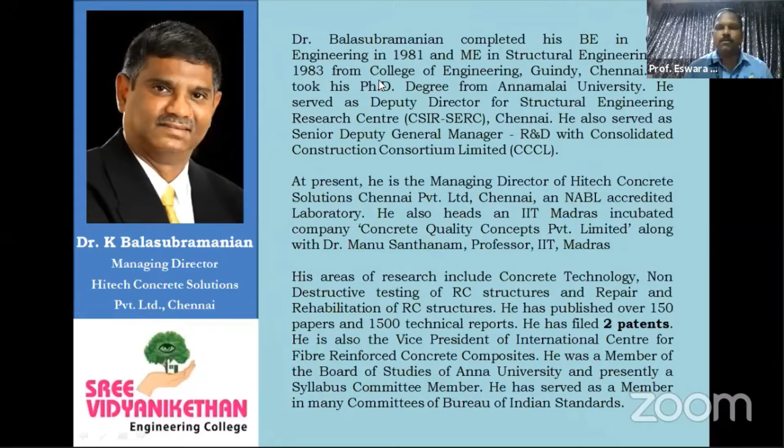This is comprising, Mr. Yuvraj was telling that it's comprising of faculty and students, and also somebody from the industry, right sir? Yes, sir, practicing engineers. It's a FDP, so faculty members, and we have opened it for even research scholars and students also. Very few students are there, around 50 to 60 students. Okay, sir, thank you very much, sir.

Good morning. I would like to thank Professor Eswara Reddy and Dr. Yuvraj for giving me this opportunity to speak to you. Today, what I'm going to speak to you is on the very practical aspects of concrete NDT practices and case studies. My approach would be basically to tell the faculty to approach any problem from a consultant's perspective. You are all very strong in teaching, and for the past 10 years I've been more in the industry, so my talk will be more oriented towards solving industry issues from a practical consultant's perspective. This is what I wanted to tell as an introduction, and I would straight away go into the topic.

I've been doing NDT for the past almost 35 years, so I would like to tell you all the positive aspects and the limitations also in the various NDT methods.

What are the various investigation methods? We have non-destructive tests, intrusive tests, and load tests. These are the three things, because IS 456 says when there is an issue, you do a non-destructive test, then do a core test, and if that fails, do a load test, and if that fails, do a load test again. And even if the load test fails, do one more time, and finally if everything is not satisfying, then you demolish. They are not straight away telling you to go and demolish a structure.

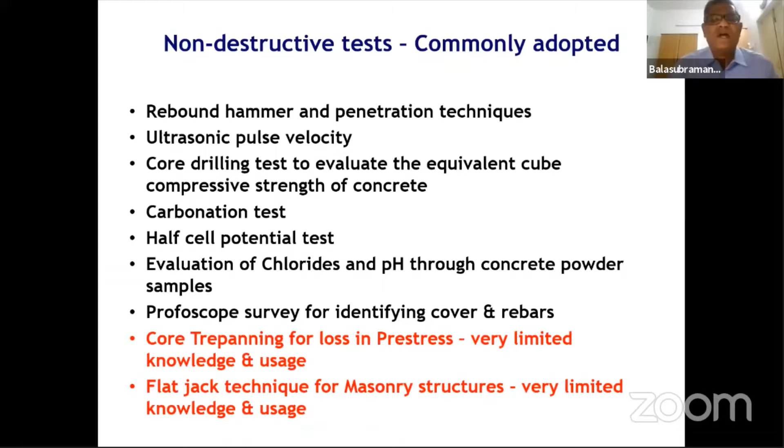What are the various non-destructive tests that are commonly adopted? I might have missed one or two, but these are the common non-destructive tests used in the construction industry: the rebound hammer test, ultrasonic pulse velocity test, core drilling test to evaluate the equivalent cube compressive strength of concrete, carbonation test, half-cell potential test, and even resistivity test, then evaluation of chlorides and pH through concrete powder samples, and the profoscope survey for identifying cover and rebars.

Some methods that are not very widespread in use are the core trepanning method for loss of pre-stress. Generally we have a lot of bridges with pre-stress girders constructed in the 80s, and now we go there for condition assessment, where this core trepanning method is very useful. Organizations like SERC have fairly good knowledge about this core trepanning method, and other places may be slowly adopting it. The other one is the flat jack technique for masonry structures.

Again, very limited knowledge and usage. SERC has been doing work in this area for more than 15-20 years. IIT Madras also does a lot of work on the flat jack technique, because we have a lot of masonry structures, monumental structures, where rehabilitation is required. To do the rehabilitation, we need to understand the stress levels, and for that these flat jack techniques are being used.

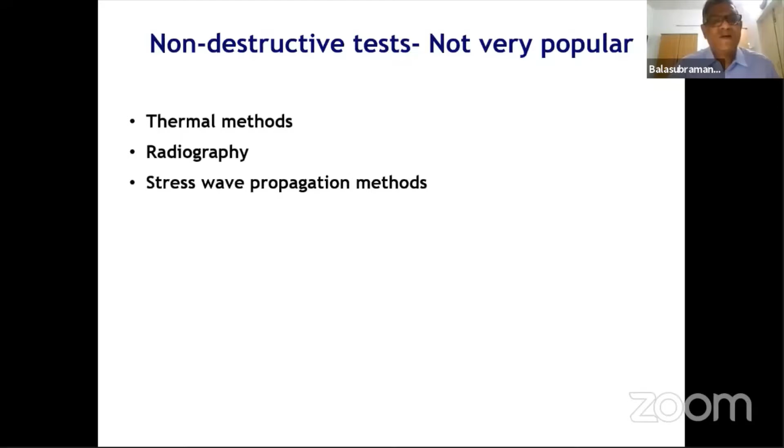So these are the various non-destructive methods. The non-destructive methods that are not very popular are the thermal method, radiography method, and stress wave propagation method. These methods are not popular because of the lack of physics knowledge on the part of structural engineers, and our reluctance to work as a team with consultants who have a strong physics base.

For example, you have impact echo. There are so many things. People are carrying it to construction sites, but the interpretation is a little difficult. Unless you have a very strong physics knowledge, or at least have somebody in the team with strong physics knowledge, it is very difficult to interpret these methods. That's why they have not become very popular.

But shortly I feel people will be working more and more on this. As they work more in the laboratory and then take it to the field, some correlation can be obtained, and then these methods will become more popular.

Right now, we are using some very rudimentary methods like rebound hammer, UPV test, and all that. My structure of the talk is: first I'll quickly go through the various test methods and their limitations. Then I'll go into situations where these tests are being used, and finally I'll wind up with a case study.

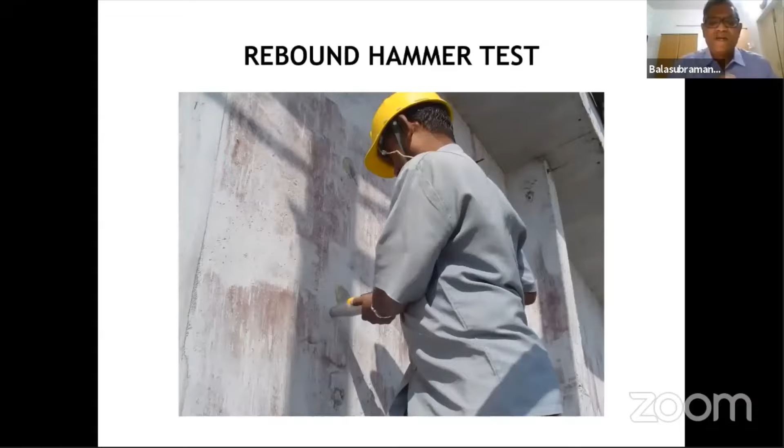So rebound hammer test - most of you are aware of it. It's basically a handheld equipment that measures the surface hardness of the concrete. The rebound is measured on a graduated scale, giving a rebound number - the larger the number, the harder the surface. It's basically a qualitative test.

Unfortunately, what is happening in our country is this rebound hammer test is being grossly misused. The reason is rebound hammer numbers cannot predict the compressive strength very accurately. They have calibration graphs supplied by the manufacturer, or some laboratories make cubes, hit the hammer, and try to make a correlation graph. But from my experience, it is very, very dangerous to use a rebound hammer to predict the compressive strength of concrete.

Because it always gives 1.5 to 2 times more than the actual strength. So basically it's a qualitative test, because it measures near-surface characteristics of the concrete, meaning it measures the quality of the cover concrete. The cover concrete is very important because it is through the cover concrete that chlorides or carbon dioxide diffuse into the concrete and depassivate the steel. So the cover concrete is more important, and this rebound number may give you some idea about the quality of the cover concrete.

But to predict the strength of the concrete based on the rebound number is a little risky. It depends on the smoothness of the surface, varies with the size, shape, and rigidity of the specimen, and is affected by the degree of saturation. Generally, carbonated concrete gives a very high number. These are some of the limitations of the rebound test.

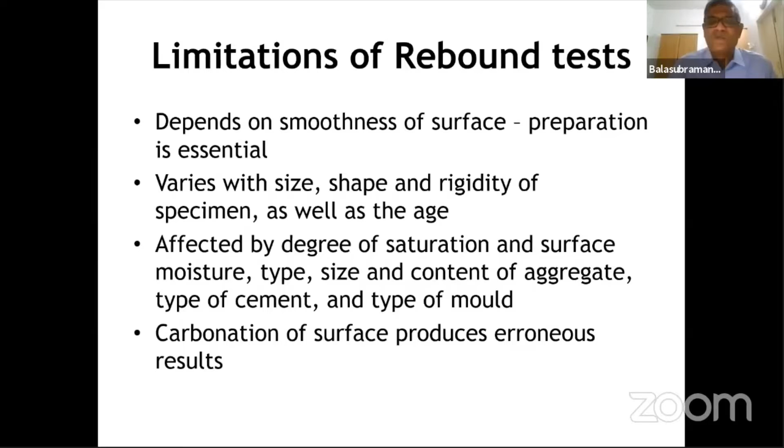As faculty, you can definitely teach this method, but you have to always put a rider that predicting the compressive strength of concrete through the rebound hammer may lead to erroneous results. Regarding correlation with strength - this rebound hammer is only 70,000 or 80,000 rupees, so the manufacturer, for example I buy from Proceq, a Swiss-based company, gives you a calibration graph based on correlations they have done with their own cement, sand, and aggregate there.

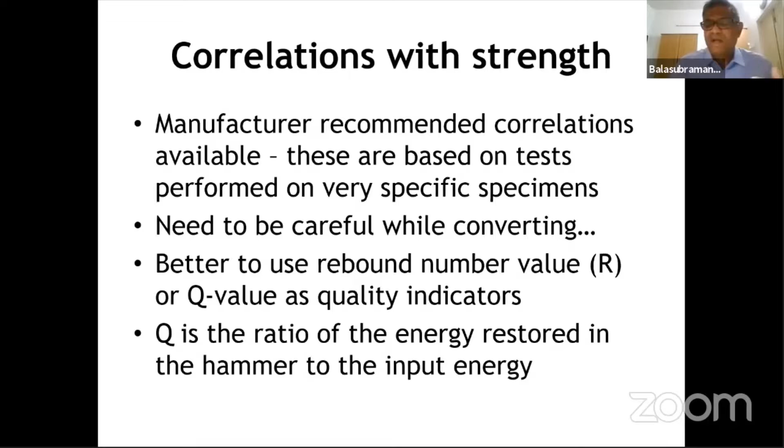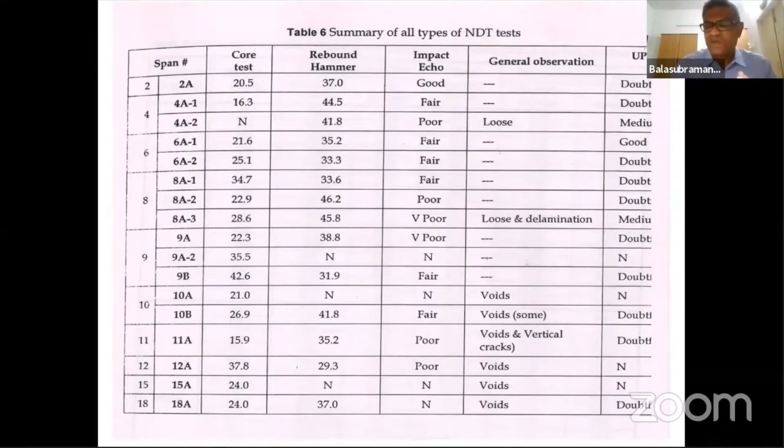So what happens in our industry is, for example, they make the columns, and within 21 days the next slab is made. After 28 days, the cube compressive strength results come, and sometimes the results are lower. Then the contractor is afraid to take the core, because he knows when the cubes have failed, most of the time the core also will fail. But the slab has already come up. So NCs are created, by the PMCs or the client engineers, and the NC has to be closed.

If he takes a core and the results come low, it may lead to strengthening, like microconcrete jacketing or FRP wrapping, depending on the designer. At that time he lands into trouble because the floor space is reduced if you go for microconcrete jacketing. So he brings in an agency with a rebound hammer, they hit it, and say the strengths are fine. So the NCs are closed. This is what I've seen from Chennai, where the rebound hammer test is basically used for this.

Another issue with the rebound hammer is when we have plastic shrinkage cracks on the deck slab. The PMCs or client engineers are unhappy with the contractor, and the contractor doesn't want to own responsibility because he hasn't properly floated the concrete to close the plastic shrinkage cracks. So he puts the blame on the RMC guy. The RMC guy doesn't know what to do, since he has to get business from the contractor. He knows the contractor made a mistake, but is not openly willing to admit it.

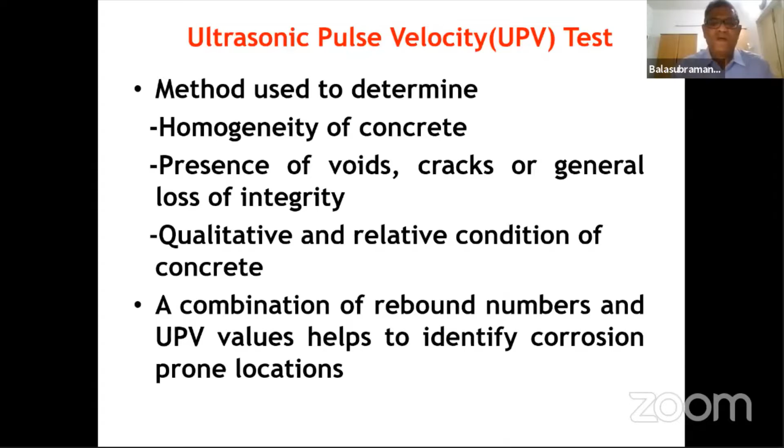Sometimes even with UPV, people try to do calibration in the lab and create a calibration graph with UPV and rebound hammer to predict strength. But even an M20 concrete should show higher velocity if properly compacted and vibrated. If there are voids or honeycombs, whether it's M60 or M30 grade concrete, the velocities will be lower. So you have to understand the limitation of these equipments in their true perspective. Just because I have about 5 Pundit labs doesn't mean I can use it for all the wrong purposes. A combination of rebound number and UPV may help identify weak areas - that's all it gives.

What are the various methods of doing a UPV test? Direct transmission test is always better - it gives you better confidence level. Suppose two sides are not accessible, then you can do a semi-direct transmission method where the path length is the hypotenuse of the triangle. Sometimes indirect or surface transmission method is adopted. For example, if you have a retaining wall where backfilling has already been carried out and the client is not happy with the quality of concrete, you cannot dig up the entire backfill, so indirect transmission method is adopted. But it's a very approximate method - you should try to avoid it as much as possible.

Sometimes these UPV tests are used to measure the depth of a crack, and that time you go for an indirect measurement. When measuring crack depth through ultrasonic pulse velocity, sometimes it gives an erroneous result, so you need to be careful. Sometimes the width of the beam is about 30 centimeters, and when you apply the equation given in Bungey or your IS code, you can get a very erroneous result. You have to be very careful while predicting crack depth also.

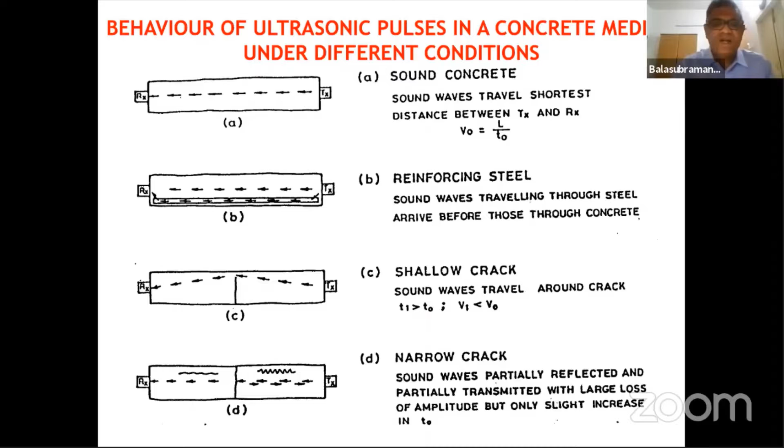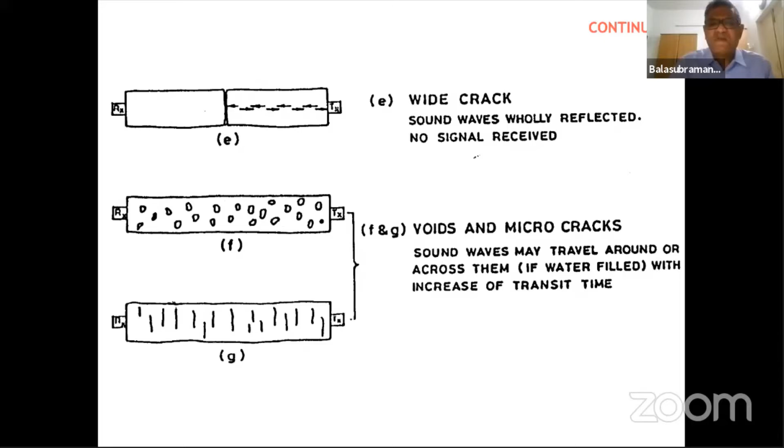This is common knowledge - if sound concrete is there, the waves travel very fast. If there is reinforcing steel, it travels much faster, but we don't apply a correction factor for reinforcing steel because the range of numbers given to predict the integrity of concrete is so wide that reinforcing steel may not have such a great impact. When you have cracks, the sound waves have to travel around them, so time taken is more. A narrow crack sometimes will be partially reflected; a wide crack will definitely be reflected, giving unstable readings or no signal. Voids and micro cracks may give a very low value or an unstable reading.

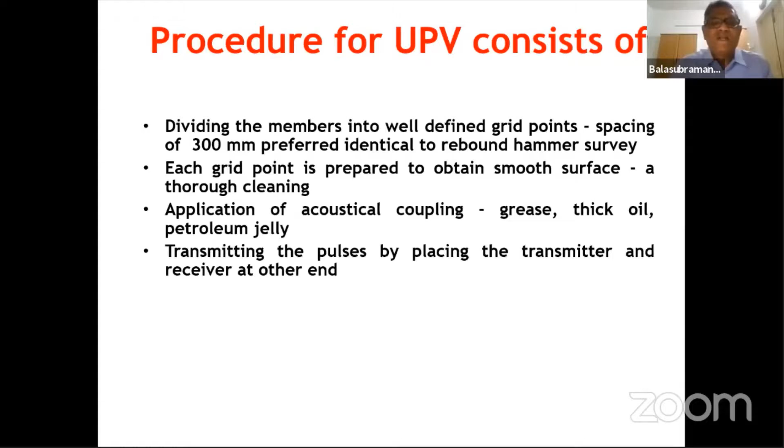The general procedure is to divide the member into well-defined grid points. There's always a debate on what the spacing should be - 300 mm is what the code gives, but as a consultant you can take a call, because if you put 300 mm for a large structure, the number of points increases and the cost of testing goes up. Each grid point spacing - 300 mm, 500 mm, or something else - the consultant can decide, but the guideline is 300 mm is preferable. Each grid point has to be prepared and smooth, and we apply acoustic coupling like grease between the transmitter and receiver so the pulse is properly transmitted.

Recording the transit time is done in an instrument - generally people use Pundit. Then velocity is calculated as L over T, that is distance between the two transducers and the time taken. If the velocity is more, the quality is more - that is, if the time is less, the velocity is higher, so the integrity is much better.

Now regarding the IS code - recently the IS code has been upgraded in the past year. The old IS 13311 said any velocity above 4.5 kilometers per second is excellent, between 3.5 and 4.5 is good, 3 to 3.5 is medium, and below 3 is doubtful.

This was very useful to consultants like us, because we had a clear idea that generally when velocities are low, meaning the integrity is not that good, the general methodology given is grouting with either a low viscous epoxy resin or cement. When velocities are above 3.5, there is no problem. When velocities are between 3 and 3.5, we found the grout generally does not go inside. And only when velocities are less than 3 kilometers per second does the grout generally go in. So it was quite okay.

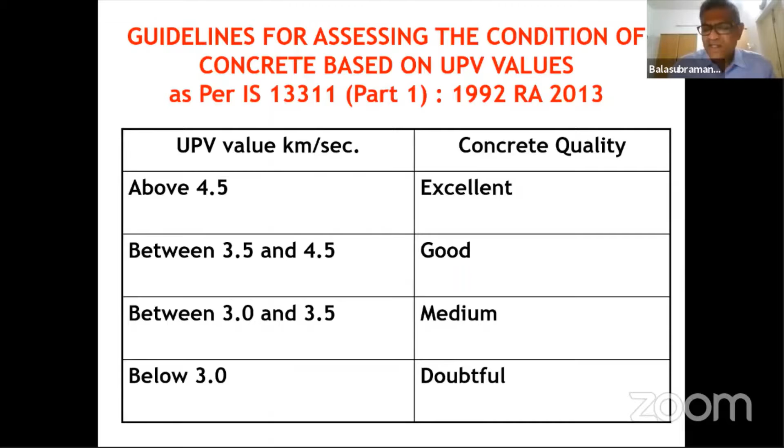Now the recent IS 516 part 5 has come out with this kind of specification. They say that for any grade of concrete less than M25, any velocity below 3.5 is doubtful, 3.5 to 4.5 is good, above 4.5 is excellent. And for all grades of concrete above M25, it says below 3.75 is doubtful.

This is something I spoke to my colleague, Dr. Manu Santhanam, who is a very eminent concrete technologist, also in the Bureau of Indian Standards. We told them that most of the structures we go and investigate are more than 30, 40, 50 years old. So the basic idea of this particular table is that the code committee, subcommittee, felt that the quality of concrete has to improve because we have gone many notches in the way we do concreting. So naturally the service life of the structure has to be good, and for that the quality of the concrete has to be good.

So they have put some higher threshold numbers of 3.75 and above. Any velocity less than 3.75 is doubtful. Now for consultants like us, we know that any velocity less than 3.75 kilometers per second, when it comes in the doubtful category, then as a consultant we have to give some methodology. Though naturally we are going to say grout, no grout will go inside for a velocity of 3.5 or 3.4, it doesn't go. So we are worried, and we brought it to the notice of the Bureau of Indian Standards, but they stuck to their stand that the quality has to improve. But our worry is, what about the structures that were constructed 50 years back or 40 years back? And when you apply this, then every structure needs some kind of methodology.

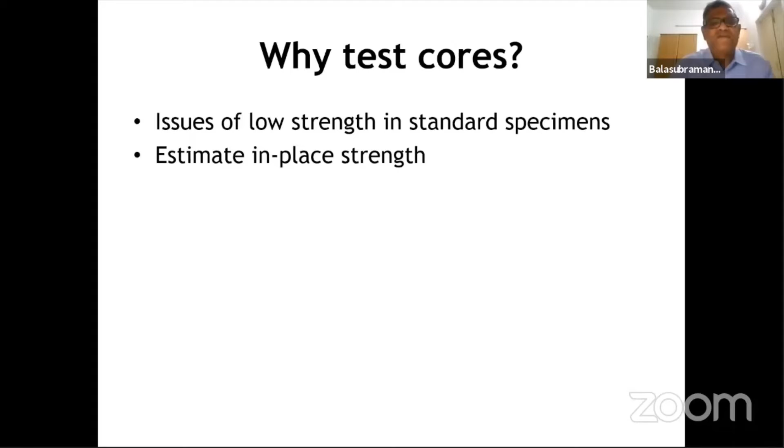Now, next is the core test. Why do we do core tests? It is basically because of low strength in standard specimens, that is the cubes. Sometimes designers may like to do a design check, and at that time the building may be 40 years old where no drawings are available. That time we do the core test to give the designer the FCK value, or sometimes to correlate with other NDT methods. And sometimes people ask for petrographic evaluation to generally estimate the internal condition of the concrete, or get information on the carbonation depth, which I'll cover in the next few slides.

And how many cores need to be tested? Again, no code of practice is very clear about it, whether ASTM, ACI, BS standards, or Euro standards. Nobody says, if the quality of concrete is suspect, how many cores we need to take. So you need to take a call as a consultant. If there is a cube failure, then take at least 3 from that particular batch.

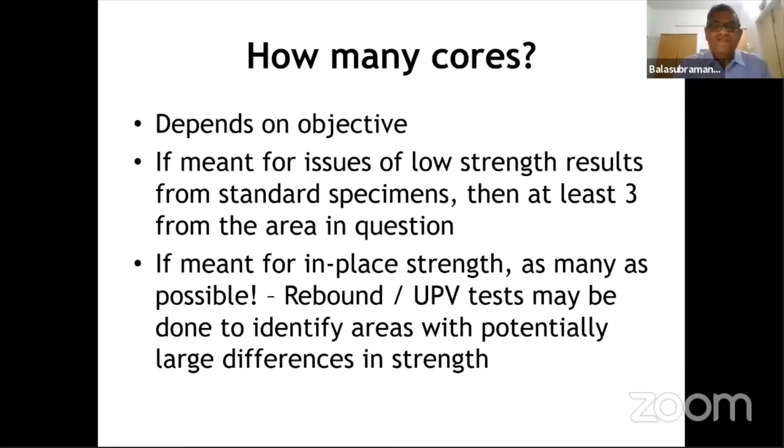If it is meant for in-place strength, as I told you, the designer wants to check a building, a multi-storied building which is 10 stories, which does not have any drawing - no GA drawing, no structural drawing, no FCK value. Then that time we try to take as many cores as possible from each floor - each floor about 5-6 cores, 2 from the column, 2 from the beam or something - and try to give the designer some kind of confidence level for him to fit it into a STAAD.Pro model or any model.

So how many cores is a question mark. I don't think people have to break their head so much into this. As a consultant, you take a call and take a conservative call - that's all. You can decide on the number of cores. And this is how a core test is done.

I mean most of you would have seen that. So what is the core dimension? Generally it says minimum diameter 100 mm or 94 mm. But today the congestion of the reinforcement is so much that we're not able to take a core. Suppose the core is 100 mm diameter, then the inner diameter is approximately 94 mm. Sometimes the congestion of the reinforcement is so heavy.

Most of the time, what we are doing - every year we are taking a few hundred cores - and then generally we are going for a 69 mm diameter core because cutting of the reinforcement has to be avoided to the extent possible. And generally L by D 2 is preferred.

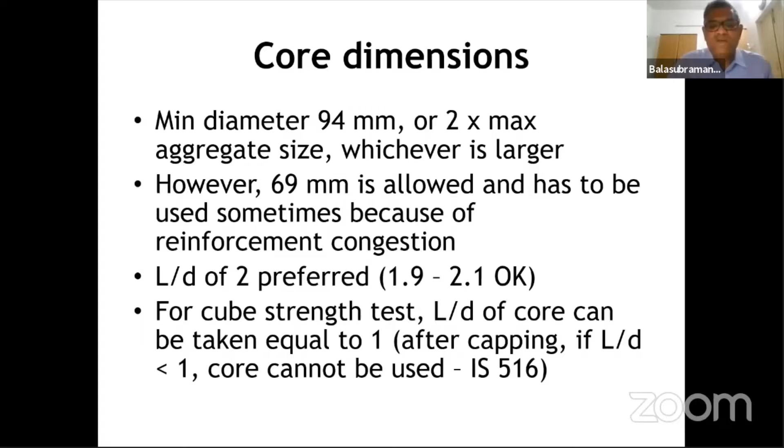Now the new code has given you correction factors for L by D which are not exactly 2. And any L by D less than 1, we should not test the core because it will not give a proper result. Testing of the core is as per IS 516. L by D should be 2, try to make it as much as possible to 2.

And the core with embedded reinforcement should be avoided as much as possible. One is cutting of the core, cutting of the reinforcement during a core test - designers will not be happy about it. Second, a core with embedded reinforcement may give you a very erroneous result if the bond is not good and all that - then they may not give you a proper result. So as much as possible, try to avoid cutting of the reinforcement from all perspectives, from the designer's perspective as well as from the core concrete strength perspective.

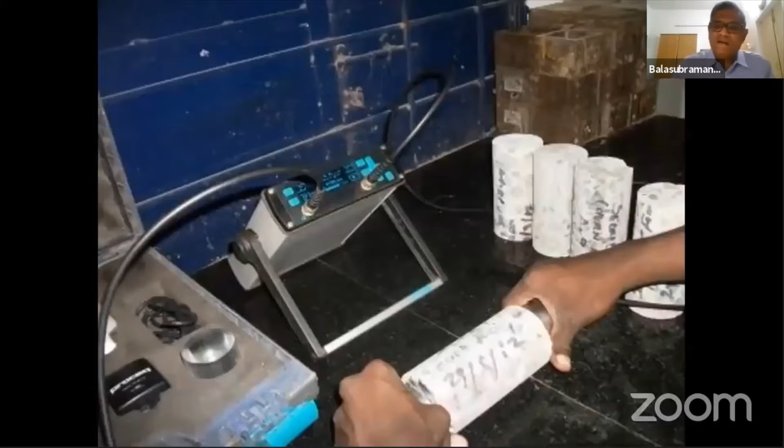And generally, we cut the core. This is a 69 mm diameter core. We cut the cores from the site, bring it to the lab, trim it to size, and then you can do a UPV also to check whether the integrity of the core is okay. And then we cap it. Actually, sulfur capping - now we are done away with sulfur capping because it is not good for health. And now we are doing it with a high strength compound. And now cores are tested, and then finally it's done.

Then what is the acceptance criteria? Now the IS code says, suppose you are testing 6 cores or whatever number of cores, the average should not be less than 85% of the FCK - not the target strength, FCK. And no individual core shall be less than 75% of the FCK.

For example, if you take an M30 grade concrete and you have taken 3 cores or 6 cores, average should be 0.85 times 30, which is approximately 25.5. And no individual core shall be less than 0.75 into 30, which is 22.5. This is what the IS code says. Suppose it doesn't satisfy M30 grade, then you need to check whether it is satisfying M25 grade and then pass on the information to the designer. So the designer takes a final call.

And then from the cylinder to cube, we apply a correction factor of 1.25. So basically, for diameter lesser than 100 mm, if the diameter is 75 plus or minus 5 mm, then we apply a correction factor of 1.03. And if the diameter is less than 70 mm, we apply a correction factor of 1.06.

So what are the various correction factors? One is for the L by D ratio - generally try to take a core with an L by D ratio of 2. If it is not possible due to practical scenario, then there is a correction factor that is given. Generally try to take a better 100 mm diameter core, but then due to congestion of the reinforcement, we need to cut the reinforcement, so we go for a lesser diameter core. And when we go for a lesser diameter core, apply the correction factor as given in IS 516 part 4.

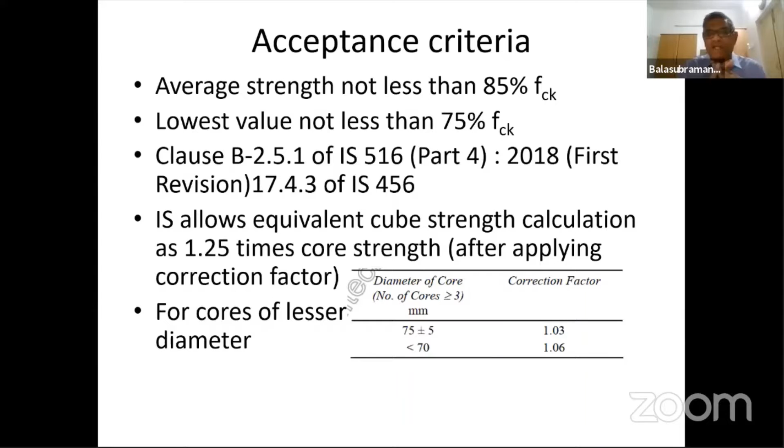Generally, this is a durability test, the carbonation test. I think yesterday they would have spoken a lot about durability. Carbon dioxide diffuses into the concrete through the cover concrete and reacts with the calcium hydroxide, reducing the pH value and depassivating the steel. That's carbonation. One way of checking is getting the pH of the concrete through a concrete powder sample.

Basically, why we do this test is during repair and rehabilitation, we always want to chip off the bad concrete. So if the carbonation depth is significant, say 25 or 30 mm, then we chip off that carbonated concrete and give a fresh concrete - put a micro concrete or a polymer modified mortar as the case may be, depending on the thickness. So this is the carbonation test.

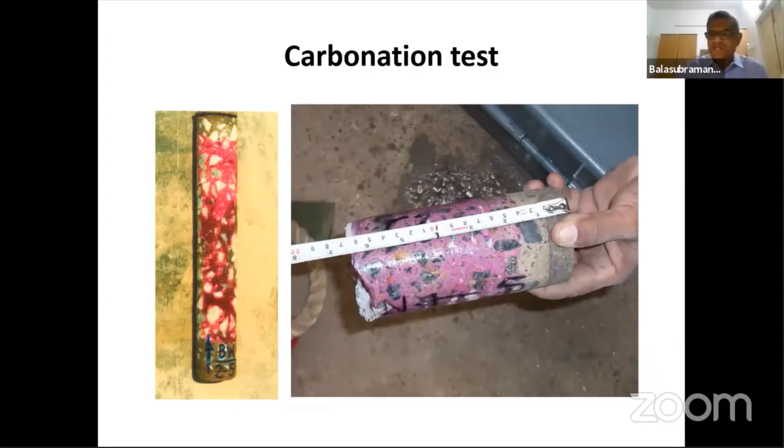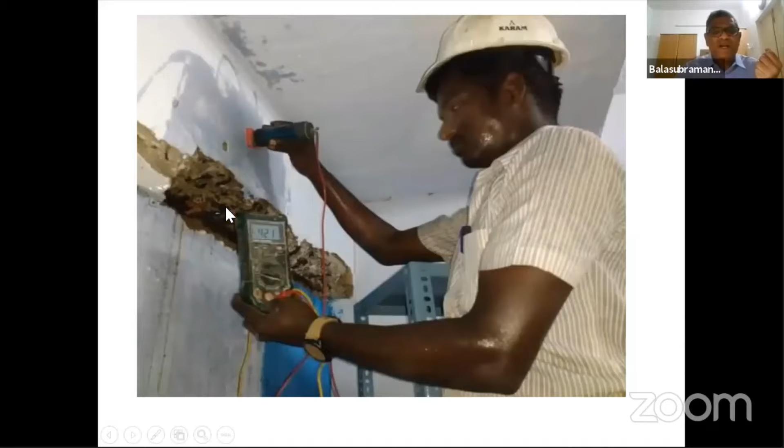Then the half cell potential test - it's an ASTM test, most of you would be aware of it. We use a copper sulfate electrode and a multimeter, one connected to the rod which is chipped open and connected here. And then we measure certain half cell potential differences.

More negative than minus 350 millivolts means 90% probability of corrosion. If it is between minus 200 to minus 350, then corrosion activity in the area is uncertain. If it is more positive than minus 200 millivolts, there's a 90% probability that no steel corrosion is happening.

For me, this test is not very useful on its own, because most of the structures we go to are terribly corroded. There is no point doing a half cell potential test on corroded areas, because obviously it has already corroded, the concrete has cracked, spoiled, and there's a loss in diameter. So generally we use this test when we go to a very huge structure, whether it is a marine structure or a bridge structure.

We are asked to give the rehabilitation methodology as well as a bill of quantity. When you want to calculate the bill of quantity, we need to be very sure with the kind of limited testing we do. So that time we do the half cell potential test on the good location, to check whether the visually good locations are in reality really good.

That's the only case where we want to use this half cell potential test, because on any corroded area there is no point, since obviously we'll get a value more than minus 350, maybe minus 500 or minus 600. So generally we use this half cell potential test in a large structure only on the good areas, so we know that visually good locations are really good from the corrosion potential point of view. That helps us decide on the bill of quantity required for rehabilitation. This is the half cell potential test.

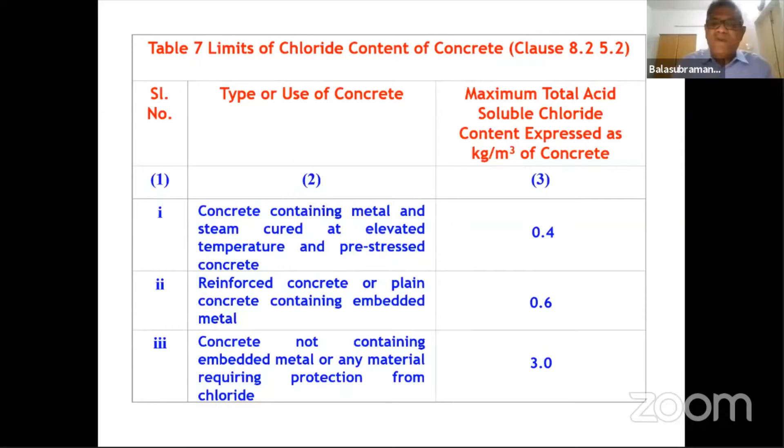Unfortunately, the IS code says this 0.6 kg per meter cube threshold should apply at the time of placing the concrete. They don't tell you what the threshold should be after 10, 15, or 20 years down the line. So this is only applicable for newly built structures - the chloride should not be greater than 0.6 kg per meter cube. But at most sites we visit, it's around 1, 2, 3, sometimes even 4 kg per meter cube in marine structures. The best way to do a powder sample test is...

My colleague Dr. Manu does this, and I find in European countries like Norway they do this too. They take a core, put it in a lathe, put it in a chuck, and use a tool to cut the powder sample. That is more precise.

When you use a drilling machine, I cannot get a proper profile - even though I put a dryer and try to blow it up, it may not give a perfect result, but it gives some idea about the chloride content. The best way would be to drill a core, put it in a lathe with a chuck, and use a tool. That way you precisely find the chloride content from 0 to 10mm, 10 to 20mm, and so on, so you know to what depth the chloride has penetrated for suggesting a proper rehabilitation methodology. But that's very sophisticated, so we go for these simpler methods.

This is basically a profometer or profoscope. It gives you the location of the rebars and also measures the diameter of the rebars. But there are a lot of limitations. A profometer will not detect a rebar if the cover is more than 70mm.

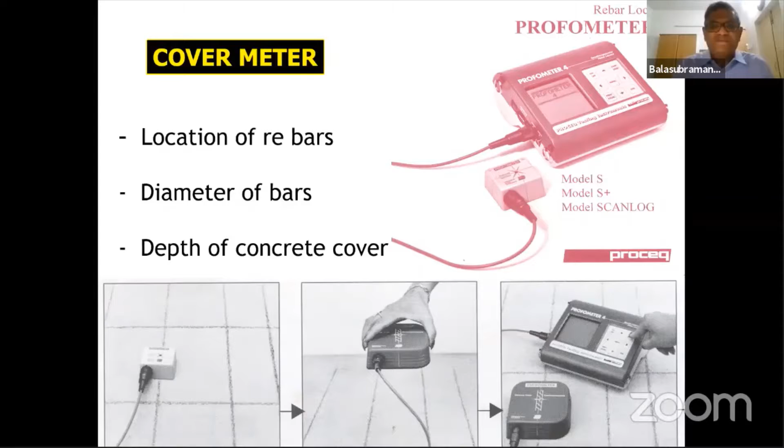But then this is a tool that gives some kind of idea to start with. The final one is the load test, because when everything else fails, the IS code says do a load test. You can do ponding, or you can use sandbags, or you can go with anything.

If you're very sophisticated, then you can go with jacks also. So these are the various things. I would like to just cap it up. So what are the various methods?

One is non-destructive testing. What are the various non-destructive methods? Rebound hammer is a good tool, but in my perspective, it should not be used to predict the compressive strength. Basically, it gives the near surface characteristics of the concrete. It gives you the quality of the cover concrete, because it is through the cover concrete that chloride or carbon dioxide diffuses in. If the quality of the cover concrete is good, then naturally your durability will be good.

Ultrasonic pulse velocity test is basically used to measure the integrity of the concrete. It tells you whether your concrete has got voids, honeycombs, or pores. So if the velocities are less, we can suggest a low viscous epoxy resin, or cement, or polyurea, polyurethane, depending on the scenario of the repair.

Now the new code that has come out is a little difficult, because any velocity which is less than 3.75 kilometers per second, they say is doubtful. But from a practical point of view, since I have a sister concern which does a lot of repair work, they are very clear that at any velocity of 3.5 kilometers per second, grout will not go inside. So the code has to take one more call on this.

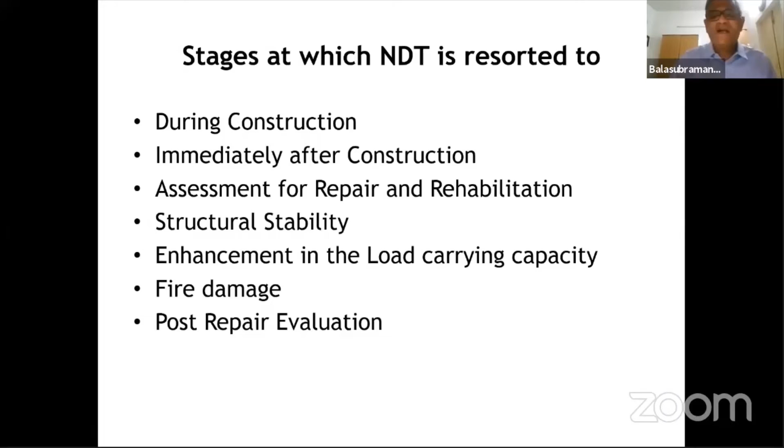And then the post-repair evaluation. So these are the stages at which NDT is resorted to. I'll go practically into what are the stages - each stage I will try to define to you.

During construction, NCs are created - NCs are called non-conformities. Maybe the faculty, you may not be very familiar with the way the industry works. Non-conformities are created and there are QC failures.

The problem in the industry is the bills will get passed - like, if it is a 1 crore bill or 2 crore bill, the bill will get passed only when the QC passes. So when there is a QC failure, then there is a lot of allagola happening at the site, because the bills will not get passed. So that's the reason why you have to take cores.

And the contractors are a little hesitant to take cores because they know the cubes are being done with so much care, and still they may fail, and if you take a core it may also fail - even though there is so much of a buffer of 85% of the FCK, they are still not very comfortable.

So they bring a rebound hammer. With the rebound hammer, they are very comfortable because it predicts the strength on the higher side. So the NC is closed and then the bill gets passed.

Sometimes there's honeycombing or poor quality surface, shutter issues - that time there is no point in putting a probe, an ultrasonic pulse velocity test on honeycomb naturally will give you bad results. So they may do a repair, and then post repair they will ask you to do a UPV. The values come good, which means the repair that is being carried out is quite effective.

So these are the cases during construction. That is when NCs are created, when cube tests fail, honeycombing occurs, and the consequent repair and post-repair evaluation. These are the stages during construction.

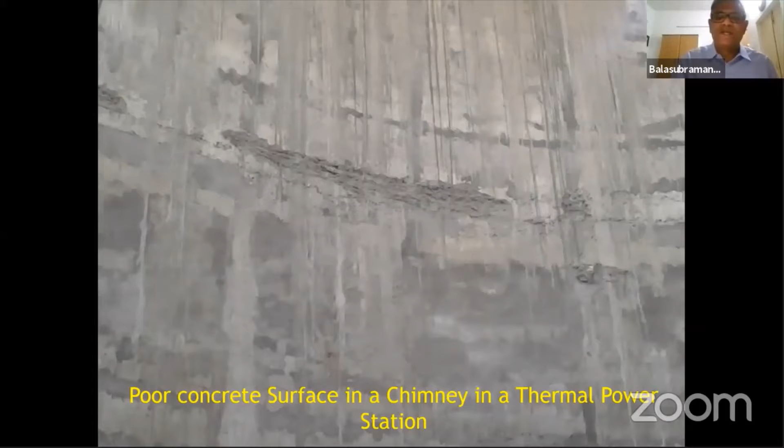If the consultant is straightforward, he will take a core and close the issue. Doing a UPV test on this kind of bad surface, obviously you're not going to get proper UPV values. The best way would be to take a core and tell the client and the PMC, your problem is there only in this area - I'll show you.

This is another chimney which again has a poor surface. Cutting a core in a chimney is always a headache because you need to have some jhulas, go on top, and then cut the chimney. So you take a core and tell the client, sir, your problem is only in the cover concrete location, so you can go ahead with the rehabilitation methodology and move on. The core of the shell itself is fine. This is how we need to approach the problem.

You can do UPV and make more money, but with this kind of concrete you will get unstable readings. So you have to be very ethical in your approach, because making money is one thing, being ethical is another. In this kind of situation, just take a core, tell the client, and close the issue so things move faster.

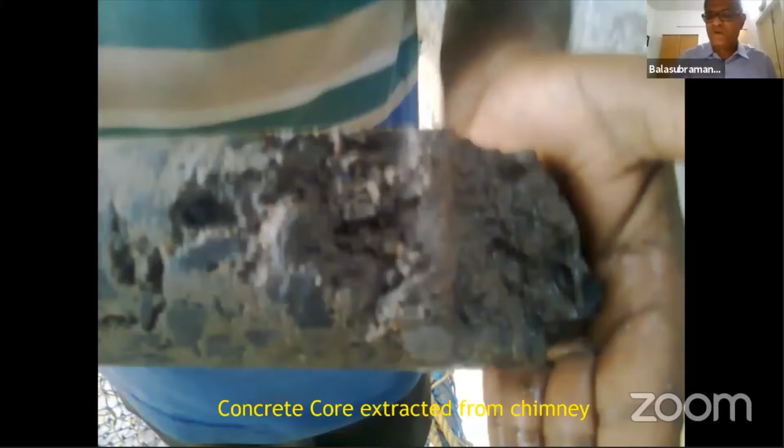Immediately after construction testing is very rarely used, because nobody wants to check the quality of concrete right after construction since everything is settled with the cube results. This is to settle future disputes between civil and other disciplines of engineering, as in the case of power plant structures, TG columns and TG decks. This has now become a tender specification.

For example, this is a TG deck which may have 14 columns or 7 columns, plus the deck itself. This may be for a 600 megawatt plant. One megawatt costs 5 crores, so 600 megawatts is 3,000 crores. When the owner puts in 3,000 crores and installs a TG on top, after some time suppose it trips.

The civil engineers construct it and move on, then it's taken over by the electrical and mechanical engineers, with very few civil engineers left for maintenance. So the mechanical or electrical engineers invariably find fault with the civil engineer, saying you've made this column and deck slab so bad that my machine is tripping. One day's trip is a 5 crore loss, and on the societal side, 100 villages may not get power.

So to settle this dispute, BHEL in the 90s said that once a TG column and TG deck are made, a UPV test will be conducted. If the UPV test is fine, the TG will be erected, and any issue later due to vibration or tripping, the onus of responsibility will fall on the mechanical engineer, because there could be a misalignment of the machines, and the mechanical engineer won't want to take that responsibility - simply passing the buck to the civil engineer when the columns are good.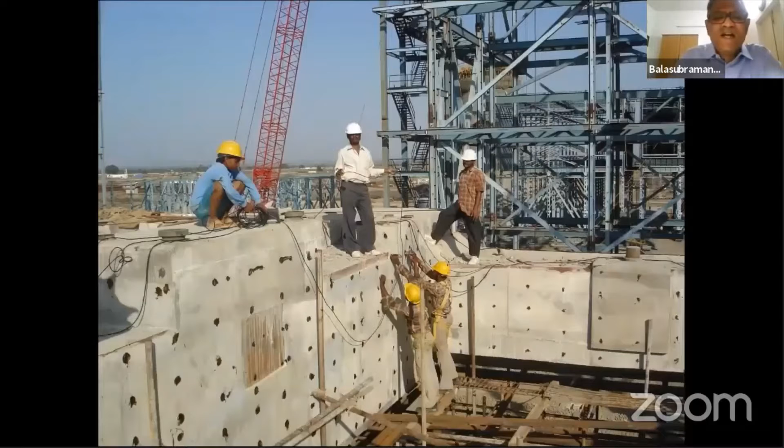So UPV is done at 300 mm grid spacing or 500 mm grid spacing, on the TG columns and also in the TG decks. Once it's cleared - I have done about 70 or 80 TGs in my 35 years experience, and all the TGs I never had problems, except this TG which is again in Orissa.

This is a TG deck - poor concrete, maybe design mix issue, then shutter issue, a lot of issues, and they created this kind of a TG deck. The owner was completely upset because this is a vibrating structure, not a static structure. If it is a vibrating structure, then it may trip anytime if your quality is bad. So there's a lot of tension - this kind of TG deck they produced.

So immediately after construction, NDT is done to settle future disputes. Mostly this NDT is done for the third reason - assessment for repair and rehabilitation, including accidents and failures - to assess the condition of the concrete from the durability issues, such as suitable repair and rehabilitation method. Most of the NDT we do today is generally for repair and rehabilitation.

Because people don't want to spend a lot of money - each rehabilitation costs 30 lakhs, 40 lakhs, or sometimes a few crores - they don't want to take a call like that. And the designers also don't want to take a call on a structure which is already 40 years old. So they want to do some minimal testing to assess the condition of the concrete before any repair and rehabilitation is taken up. This is also in case of accidents, poor maintenance, fire, so many things.

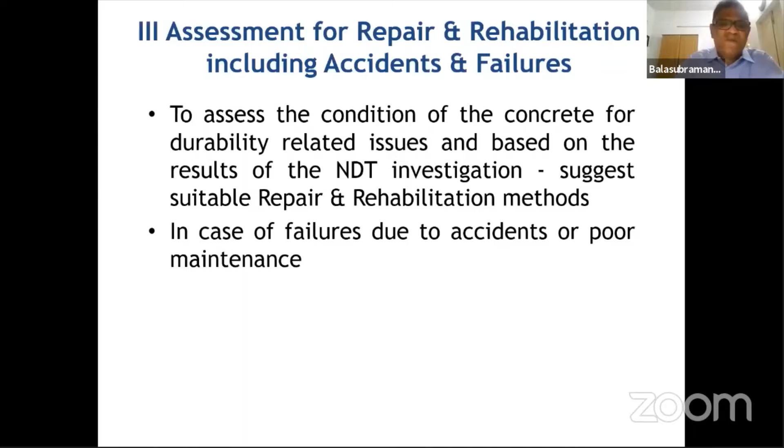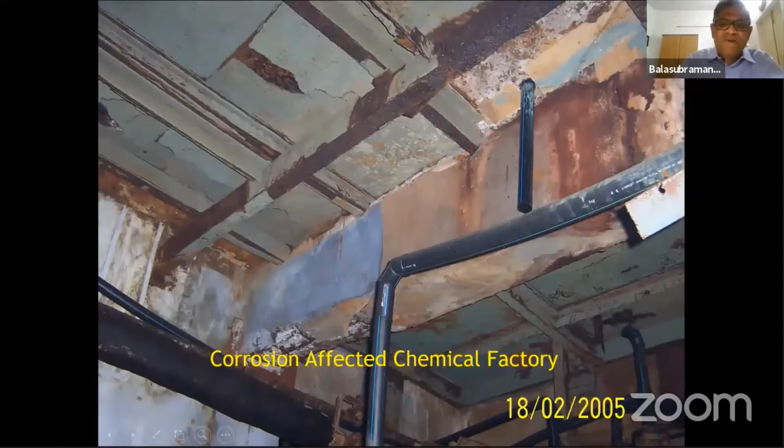For example, there's a corrosion-affected chemical factory - I'm just telling you the conditions. This may be an institutional building or a factory building, or it could be a hydel power station which has not been functioning since construction - again NDT is utilized. Or it could be a bridge where you find the entire girder has complete spalling of concrete, and corrosion and exposure of reinforcement has happened.

And there's an NHA bridge, or it could be a bridge where a few spans have fallen down due to a certain accident. At that time, people have to understand the remaining condition of the remaining two spans - these are all pre-stressed bridges. So that time NDT is resorted to.

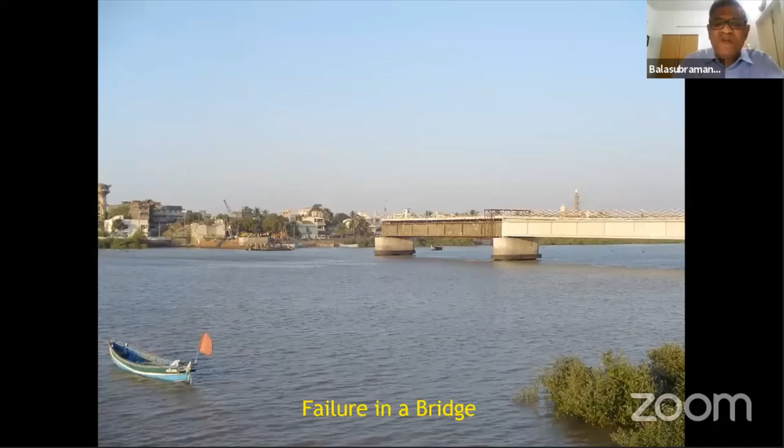And doing an NDT in a structure like this is so difficult because scaffolding becomes an issue. So you need to fabricate a movable scaffolding thing which moves along with the span.

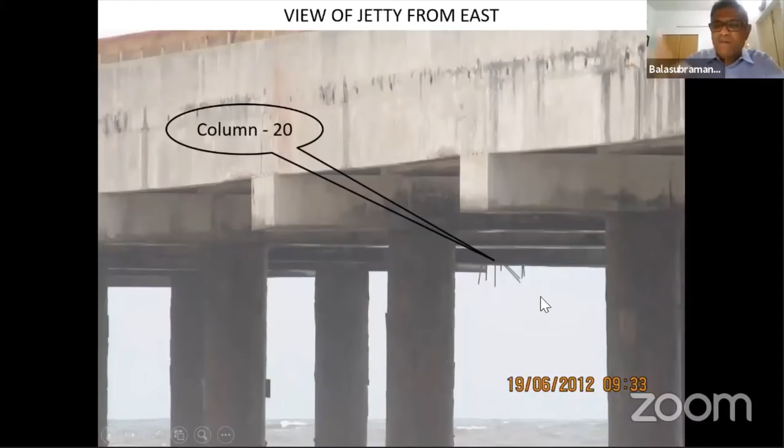Or again, this is another jetty in Visakhapatnam where this pile has been knocked off by a barge again - one pile is just knocked off. So that time NDT is resorted to.

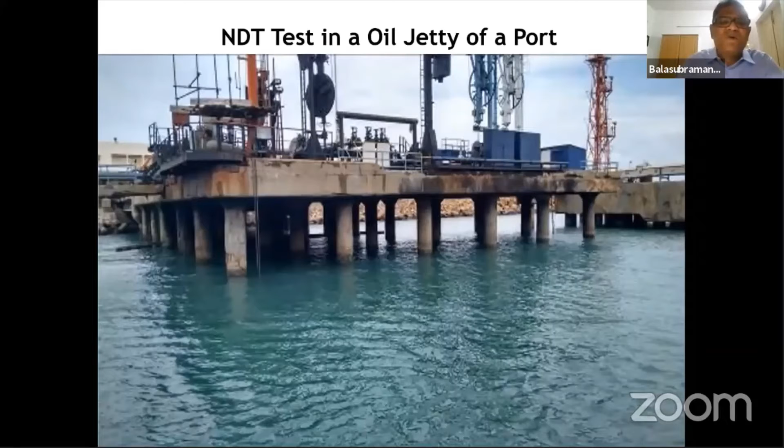Or it could be a dock jetty which was constructed 40 years back - so much corrosion, this is in West Bengal. And this is another approach trestle in Tamil Nadu, where a lot of corrosion is there. And again, there's an oil jetty, again in Tamil Nadu - you can see the corrosion here, a lot of corrosion. I'll just put it as a case study.

And what is happening is, in the earlier days, people are resorting to shotcreting without any shear connector. So within about 5-10 years, whatever repair they had carried out is coming off. So again, more money spending.

So again, that time NDT is resorted to, because they want to get the bill of quantity and the methodology, and they want to be very sure about the condition of the concrete. And again, this is another jetty head where you find that they have put some weld mesh and shotcreted - the shotcrete has come off after 5 years.

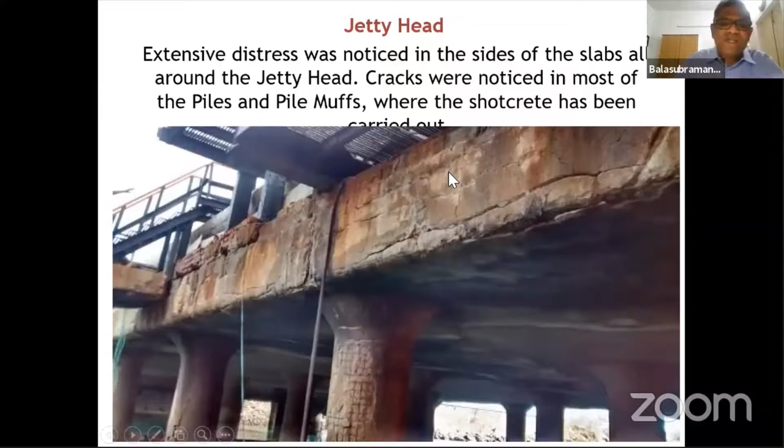So again, this is another coal jetty again in Tamil Nadu, and you can see the kind of corrosion happening. And this is another jetty head again, or this could be a naval jetty at Vizag, where again a lot of corrosion happens, because these are all marine structures, corrosion is inevitable.

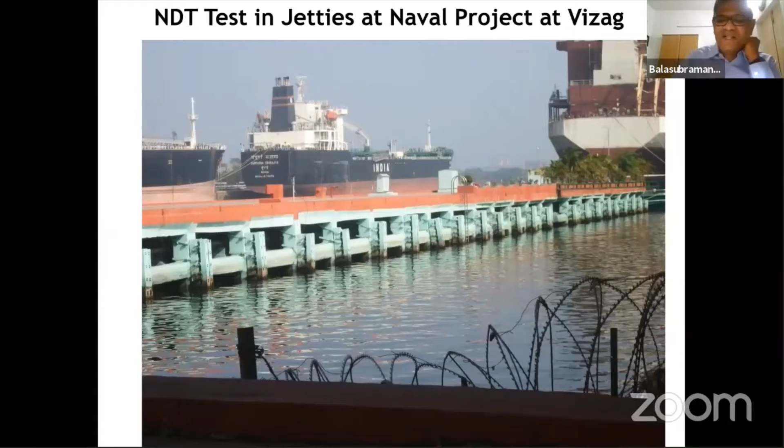If corrosion is detected at a much earlier stage, the repair cost will come down, but that doesn't happen. It happens only when it goes very bad, and then people start worrying and bring in consultants.

The fourth case where NDT is resorted to is structural stability or enhancement of load carrying capacity - old RC structures with no record of GA drawing, grade of concrete, or reinforcement details. You go to many 10-story, 12-story structures with no GA drawing, no reinforcement detailing, no foundation detail, no grade of concrete. At that time we do NDT to give input to the designer on these aspects - profoscope survey for reinforcement detailing, take the core to give the grade of concrete, and from the durability point of view, UPV test or powder samples to give the designer confidence to go ahead with modeling.

Again, microzonation - for example, I'm coming from Chennai. Chennai was in zone 2, now it has become zone 3. That's fine, but what about public buildings? Because IS 13920 zone classification and detailing are so different, some owners are getting worried due to microzonation about whether their building is okay. Particularly government buildings, hospitals - these are very important because they drive the whole government, so whether those buildings are okay. That's when NDT is resorted to, because they don't have any drawings, no GA drawing, no grade of concrete, no foundation detail.

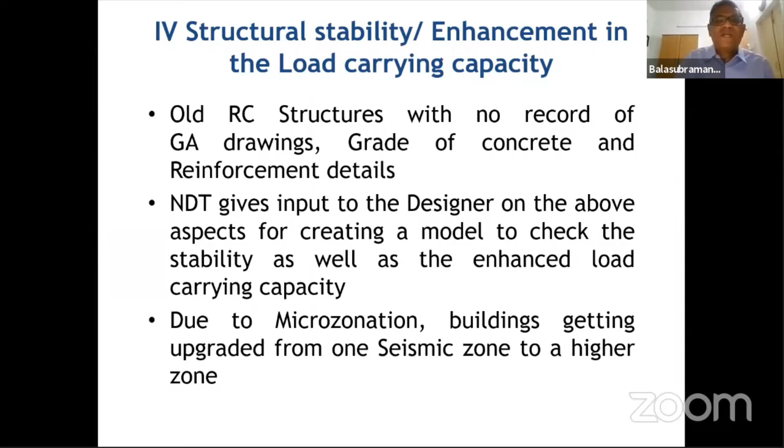For example, I'll give you one case study - a building in Chennai where the family got into trouble and the trust took over. The judge who took over and became chairman of the trust wanted to get the stability certificate before moving on. So to get the stability certificate, they approached IIT, and we were helping IIT with this work.

No drawing, nothing. So we had to do rebound hammer testing from the durability point of view, UPV from the durability point of view, core samples for giving input to the designer for the FCK value, and profoscope survey to give the designer the reinforcement detailing. We didn't stop with the profoscope survey because it was a 10-story building - we chipped it open at more than a dozen locations to cross-verify whether the profoscope readings were correct, otherwise corrections had to be carried out. The second layer of reinforcement, whether it was there or not, we can't determine with a profoscope survey alone. So we took a JCB, dug the foundation, and found out what kind of foundation had been provided so the professor could feed it into his model.

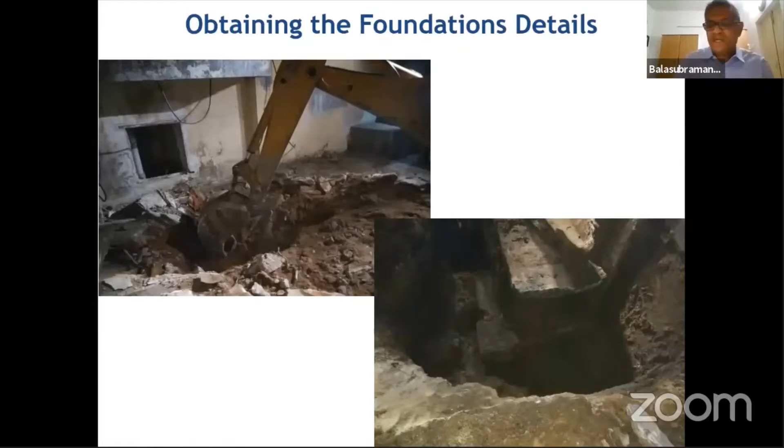So this is another case where NDT is resorted to - during construction, maybe for NCs and other quality issues; then immediately after construction, which doesn't happen in our country except in cases like TG decks and TG columns, because even with a 1,000 crore project, once it's done nobody goes for quality checks since they say QAQC processes were in place and records exist. And the third case is for repair, rehabilitation, and corrosion.

People don't want to spend too much money on testing, but at the same time they do want to spend that little amount because they're spending huge money on the repair and rehabilitation. So that's one case. The third and fourth are for stability certificates, where they go for NDT because no GA drawings are available, and the designer requires all this data. So these are the situations where NDT is resorted to.

As a consultant, deciding how many tests to do - how many cores, how many UPVs - depends on the individual consultant's prerogative or confidence level. Because today, when you test more, people object since it costs money, so they don't want that. From my perspective as a consultant, people will say, why did you do such limited testing, how did you manage to give a rehabilitation methodology for 2 crores with so little testing? It's very difficult to defend. That's why we try not to do too much, but at the same time you can't do too little. So you have to strike a middle path - what that middle path is, is very difficult to predict.

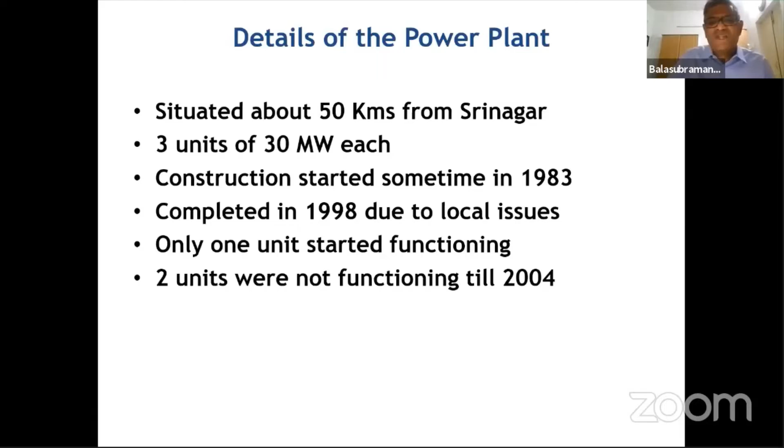But for them, 30 megawatts is something big - here for us, 30 megawatts is nothing. So 2 units were not functioning, and they brought in a lot of consultants who were not able to solve the issue. Finally they came to SERC.

When we did the initial inspection, I went from the NDT point of view, from the concrete point of view. Fortunately for me, I took a vibration expert, because these hydropower stations are all vibrating structures. By doing simple UPV, rebound hammer and durability tests, you are not going to find out why the equipment is tripping.

So we took a vibration person. Ultimately, without the vibration studies, we could not have solved this problem.

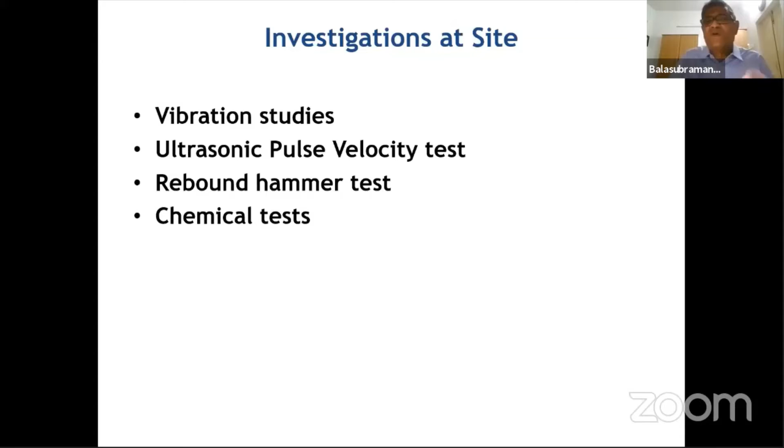They usually put the pickup and then run the equipment at various RPMs - 300, 500 - because it runs at, I think, 3000 RPM or something, I'm not very sure. So they run it at various RPMs and start measuring the vibration levels.

They put it on various columns, because in a TG, in a power station, there are many levels, many columns, many slabs, many beams. As a consultant, it's a nightmare to understand why the hell the machine is tripping.

So we need to narrow it down. You can't go and test each and every column or beam or element in that power station - it's very huge. So the vibration studies people started putting the, what is it called...

They started putting the pickups and running the equipment at various RPMs, trying to see whether the threshold numbers are going up from the vibration point of view. Simultaneously, we were doing UPV in the various columns, and the durability was not an issue there.

But still, as a consultant, you have to do all those things. Finally, the vibration team said the small 1 meter by 1 meter pedestal - it's called the upper bracket or something - was getting a lot of vibrations. They told us to focus more on these brackets.

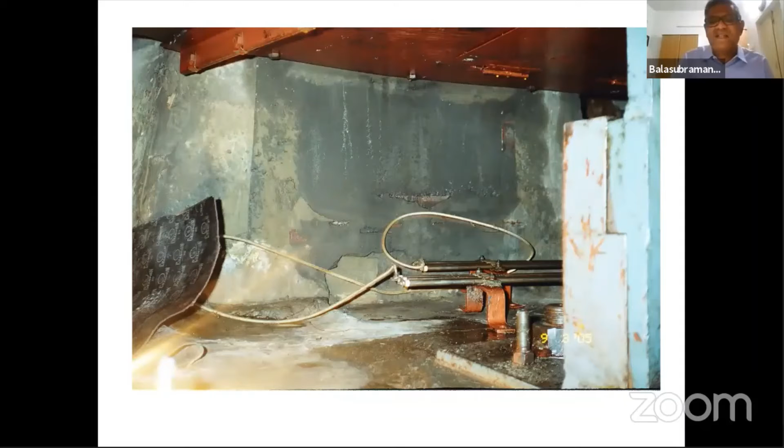There are about 8 or 12 small brackets, like pedestals. When we did the UPV, the values came very bad - we were not getting any reading, whereas in the other columns the velocities were so high, there was no issue. So we felt the problem could only be in that small pedestal - it's called the stator support pads at the LGB floor.

Generally, when you get a higher vibration and lower UPV values, the general tendency is to go and grout it. Here we took a call - it's such a small thing, we can remove the equipment and then break the pedestal and make it into a newer one. Put a fresh pedestal. And ultimately that decision worked out properly, because when they broke it open, they found that the tie rods of the equipment were not properly welded to the pedestal. That was the reason why it was creating the issue.

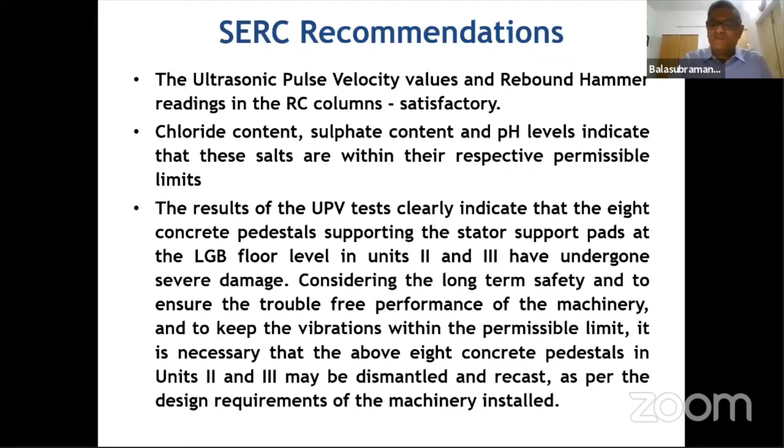Looks very simple, but it was by sheer chance that we told them to break it open. General tendency for any consultant when he doesn't get a proper UPV value is to go and grout it. But looking at the long-term issue of this particular plant, and since a lot of consultants have come and gone, people are not able to think. We did not want to take a chance. We said break it open because it's not going to cost you any money. When they broke it open, they found that the welding was not okay. So they broke it open and then repaired it.

Post-repair investigation was completed in 2006. Until I heard about 4-5 years back, all 3 units were running successfully. This is a repaired pedestal. We took the readings, they were coming good. So they are coming very high. So this is one case study.

This case study, I put it basically because a lot of people think that working in a team is always good. For example, if I had done so much of NDT, I know everything, and then I go with that thing, I would not have solved this problem. Unless, because it's a vibrating structure, get a vibration guy - it's better, you will be able to solve the problem. Otherwise you will be going round and round, you won't be able to solve the problem.

So it is not very specific. What I'm trying to tell the faculty is, there is no bracket kind of a thing, black and white thing - you have to do this to solve the problem. So you need to think, and then you go along with the flow, and see if you are not having core competency in that area. Bring in people, work as a team, and then try to solve the problem.

So this worked successfully for us as far as this particular thing is concerned. Because without vibration studies, my UPV would have told everywhere it is good - I would not even have gone near that pedestal. Because it's a small one, I wouldn't have bothered, because the testing time is limited. Costing again makes a huge impact on the testing. Even though I should not be telling it to the academic people, costing makes a lot of impact in the testing, because you cannot be going on endlessly testing - it is money. The money people are not willing to give more money because they are having their own constraints. So with that limited thing, we need to arrive at something that has to be very sensible.

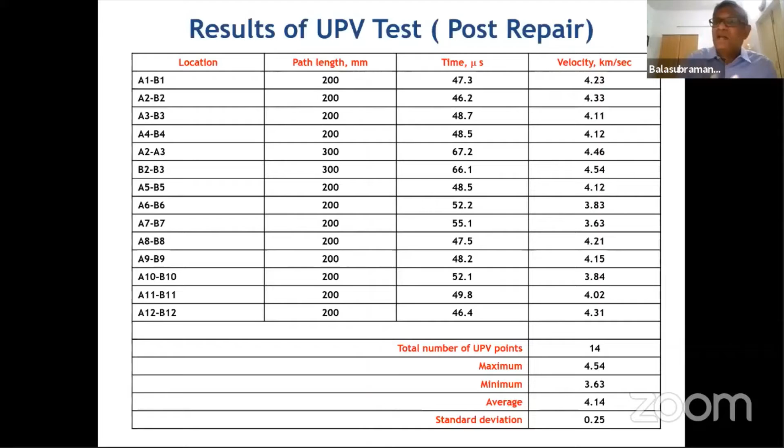This is one case of a power plant where the issue was solved with vibration studies. And second, I have taken up a bridge. This again happened somewhere around 2005, 2006, I'm not very sure. This is in a place called Daman. Daman is very close to Vapi in Gujarat, about 2 hours drive from Mumbai. And this is a bridge.

This is a union territory. If you look at this bridge, one side is a residence, the other side are the government buildings and the schools. So this bridge may be not more than 500 meters. This is a very, very important link to connect the people to the schools. And what happened was this bridge was constructed in 1967. I'm just making it as a story so that you're connected to it. 1967 or 68, the bridge was constructed.

500 meters away is the sea, so a lot of corrosion, a lot of chlorides. And at that time, during the construction, I heard that the well foundation sunk. Because the well foundation sunk, the PWD had made a steel truss to support the deck slab. But unfortunately, that steel truss was not painted, it seems. That's what the engineers told.

Since the steel trusses were not painted regularly, they corroded. People were complaining about vibration and noises, but the authority never bothered. So one fine afternoon, when the schools were closing, 3 or 4 spans came down, killing about 30 people, mostly school children, though a lot of children were saved.

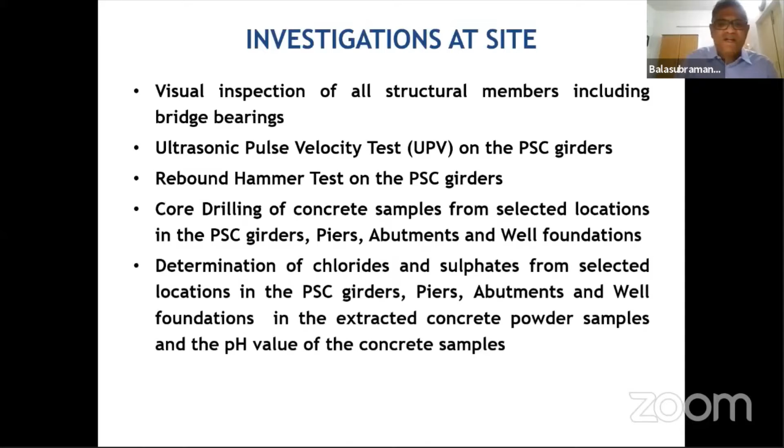There were pre-stressed concrete girders, deck slab, reinforced concrete piers, abutments, and well foundations. These were the structures investigated. We did visual inspection, including the bridge bearings. UPV test was done on the girders, rebound hammer test on the girders, core drilling on the girders, piers, abutments, well foundations. Then durability tests like chloride and pH, all those things were done.

And because the site was difficult, they had to fabricate a suspended platform with a roller, so it moves and then gets dismantled and taken to the next span. The girders, diaphragm walls, deck slab, all that were investigated.

Cores were drilled from the foundation, and because it was a pre-stressed girder - I'm not an expert on core trepanning, but I can give a fair idea - we paste a strain gauge on the girder, then take a core drilling machine and drill about 2 to 3 millimeters. When you drill it, the strain is released, and that is measured through the strain gauge in an equipment, so you know the strain. The E value can be found, it is nothing but 5000 root FCK, because we are taking so many cores, so FCK value is known, and 5000 root FCK gives the E value.

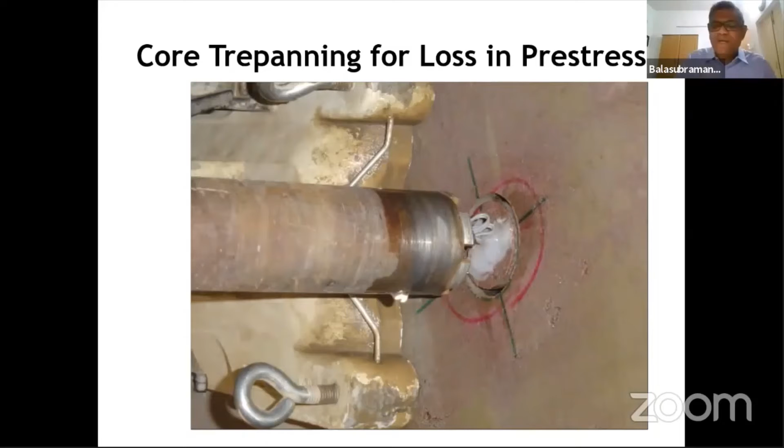So E value is known, strain is measured through this core trepanning method, so you get the stress. It may not be the exact available pre-stress, but it may be around 80-85%, because SERC has a lot of correction factors through experience gained over many years. So they can get an approximate level of the pre-stress, because the designer needs to know this for the load carrying capacity as well as the rehabilitation. Core trepanning method was used to get the loss in pre-stress, and all the values were tabulated and given to the designer.

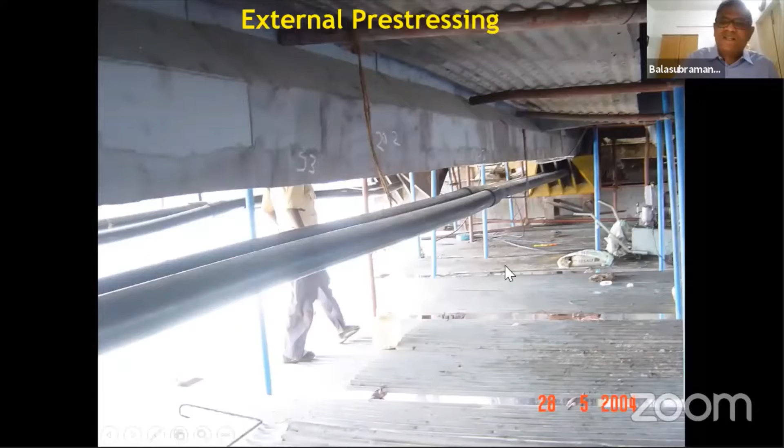We did a lot of testing, because the designer said, don't bother, test as much as possible. And a lot of chemical analysis was done, because it was very close to the sea, and we found a lot of corrosion also. Ultimately, the designer came out with external pre-stressing as the rehabilitation methodology. I think Freyssinet did the work - they put the cables, did the external pre-stressing, and then rehabilitated it.

And then we did a load test using sandbags, and the total station was used to measure the deflection. And then the bridge was cleared.

From the durability point of view, we had given some grouting wherever there was some issue, and then a silane siloxane coating, because we didn't want to take a chance with this bridge. So a silane siloxane coating was given so that it does not allow chloride to diffuse into the concrete.

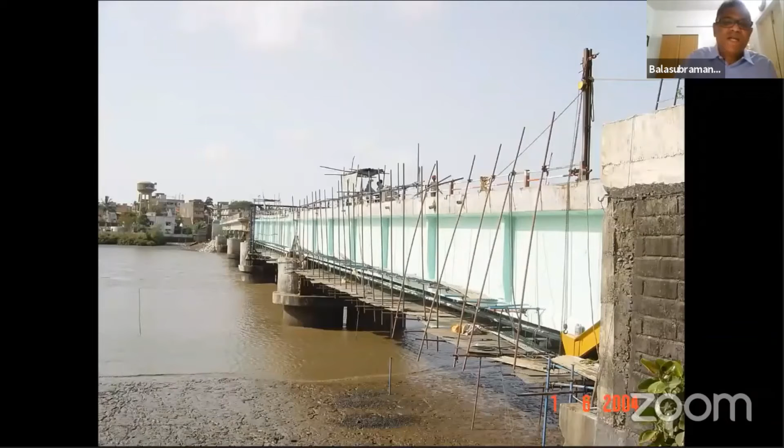And then the bridge rehabilitation was completed, and from the other side they did the new construction, and then it was thrown open. So here is a case where NDT was carried out to give more input to the designer, so that he arrives at the load carrying capacity or the stability, and then based on that, any lacuna, the rehabilitation methodology. So this is another case where NDT can be positively used.

The third case study which I'll be projecting is more on the durability point of view. This is an LPG berth in a port in Tamil Nadu. We do a lot of marine structures for IIT Madras Ocean Engineering Center. We do a lot of non-destructive testing, and then give the rehabilitation methodology along with the bill of quantity.

And Ocean Engineering Center, being very strong in design and other things, uses this data, and their scope will be much more, while our scope is very limited towards the condition assessment. So in a marine structure, you may have a mooring dolphin. Mooring dolphin is a place where you tie the ship. The ship comes into the breasting dolphin, and in a fender it stays there, and then with the rope it is tied into the mooring dolphin, and all those structures are made out of reinforced concrete.

So the scope and objective of the work: mooring dolphins, there were 6 numbers, so 75 points in each mooring dolphin. Don't ask me how you got 75 points - it is all worked out based on so many things, costing and other things. At the same time, being an IIT project, we need to be careful, because when it goes for a third-party vetting, we should not be pulled up for arriving at the methodology with such limited tests. So for breasting dolphin, 4 numbers, we had fixed some numbers.

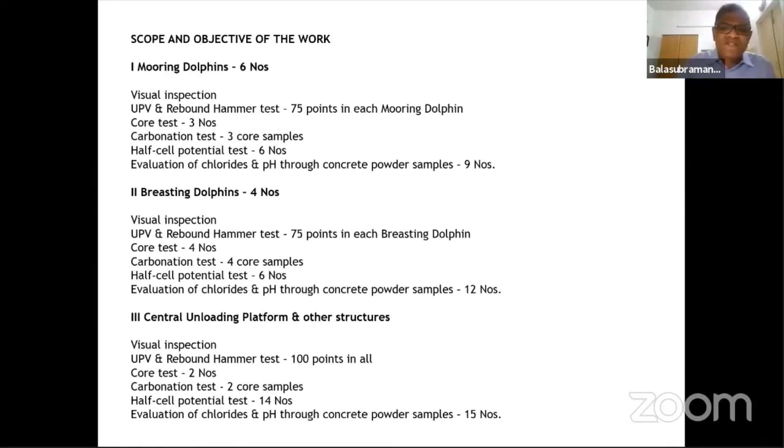And FCK core test, even though it's a durability issue, core test we have to do, because the designer has to be very confident about the FCK values. So we did core, carbonation, half cell, powder samples, everything. And visual observation we found in the mooring dolphin.

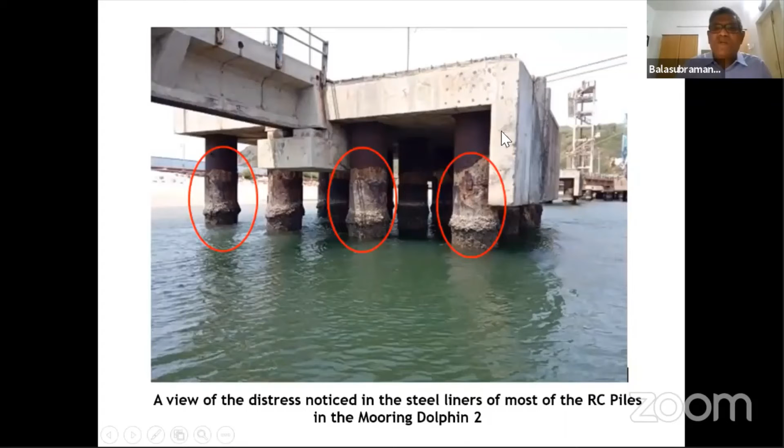I'll not go through because of lack of time, but we found in the mooring dolphin RC piles, steel liners were damaged, spalling of concrete, exposure of the rebars - for example, exposure of rebars, and all the steel liners of the piles of the mooring. This is a mooring dolphin, they're damaged. And if you look into the breasting dolphin, again, steel liners were damaged in the RC piles, cracking, spalling of concrete, and cracking was noticed in the top floor of the slab. See here, all the steel liners were damaged.

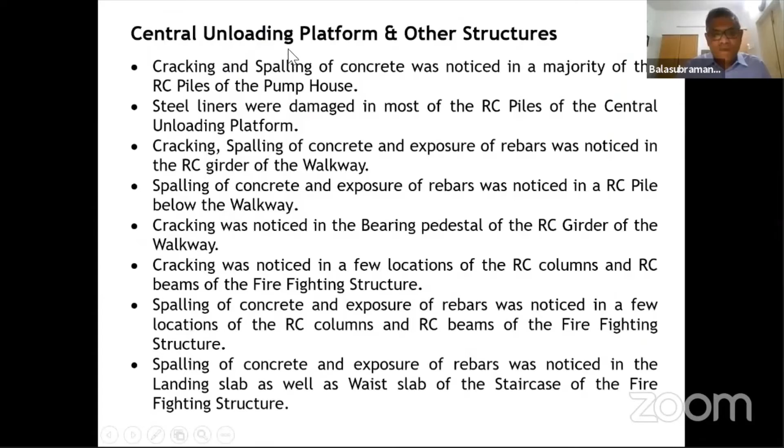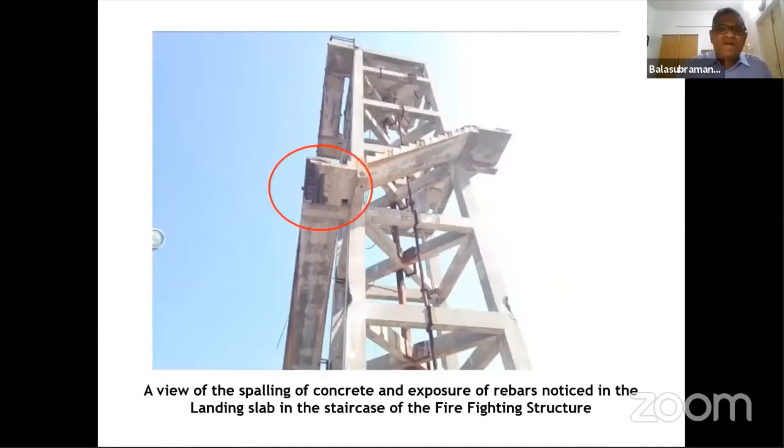So we did NDT testing - rebound hammer, then UPV, and core testing, and half cell potential testing, powder samples - and the summary is that UPV tests showed good results because UPV tests were generally conducted in the good location. Again, as in the case of a half cell potential test, you can't go and do a UPV test on a bad location - you'll get definitely bad results.

So when you're giving a bill of quantity, you have to be very sure. I cannot give a bill of quantity only for the bad location. I need to check the good locations also, because these are all very old structures in a marine environment where there's a lot of chloride.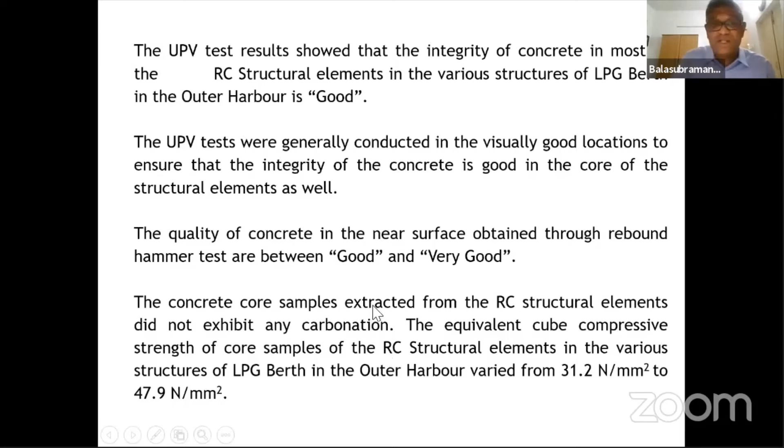And the core tests were good, 31 to 47.9, so the designer gets confidence. And half cell potential naturally will be more than minus 350 millivolts, even in good location, because it's chloride infested, with abnormally high chloride numbers.

The pH of the samples were quite okay. So the corrosion of the rebars is mainly due to chlorides.

The rehabilitation methodology we gave was: distress RC piles in the splash zone get underwater microconcrete jacketing; above the water level, microconcrete jacketing, minor distress with polymer modified mortar, top floor removed and redone with a floor hardener. Then we gave Dekguard, a silane siloxane coating - Dekguard is a commercial name for Fosroc, so they can use anything, silane siloxane or acrylic aliphatic type.

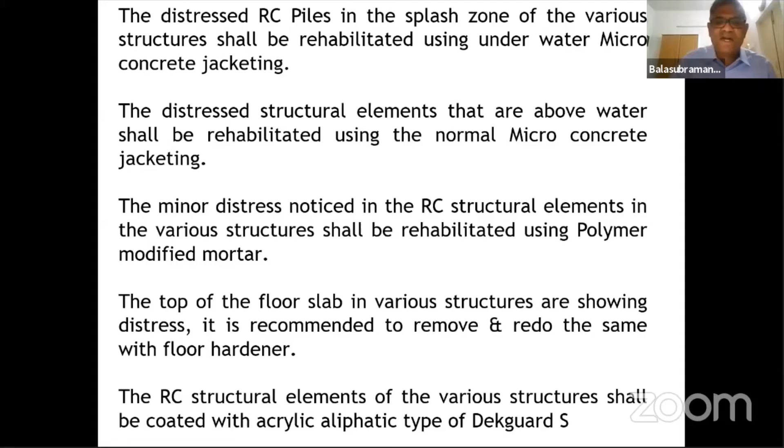The methodology is basically to remove the damaged concrete portion, based on chloride levels, chip open the unsound concrete, and then provide shear connectors, because the old concrete has to bond with the new concrete. In some ports where they did shotcreting, we found the shotcrete was coming out because there was no shear connector bonding the old concrete with the new concrete. So shear connectors have to be given.

If the rod has undergone more than 30% loss in diameter, you have to put additional reinforcement, connect it to the shear connector, then give the formwork. Sometimes we give sacrificial anodes because it delays the onset of corrosion - that's a different topic by itself, so we'll not go into it.

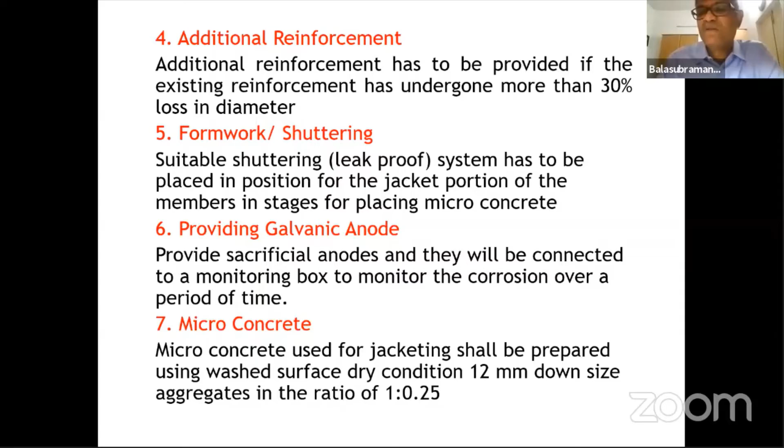Then we put microconcrete. Why the cost goes up is because of microconcrete - normal concrete, if it's about 40mm or 50mm, is very difficult to place, so we go for microconcrete. One cubic meter of regular concrete is 4,500. One cubic meter of microconcrete with 50% chips is approximately 50,000. That's why all these repair values go up like anything.

Then we need to give a curing compound, because these are all marine structures where curing may be difficult. Then we give a protective coating. Because we are giving a sacrificial anode, you can provide a monitoring box so they can take half cell potential readings every year to understand whether any onset of corrosion is there. If there is onset of corrosion, they can go there, remove that sacrificial anode and put a new one. Each anode costs 2,250 rupees, so that increases the cost, but it is good for marine structures.

So we prepare the abstract - what is the quantity, what is the rate. Then surface preparation, anchoring the main reinforcement into the pile and deck slab, additional reinforcement, shear connector, sacrificial anode, anti-corrosive coating, epoxy jointing compound, formwork, microconcrete jacketing, underwater microconcrete jacketing, polymer modified mortar, then curing compound. Here, because the deck top slab had issues - demolishing, then concreting, floor hardener, then protective coating with silane siloxane, debris removal. So the whole thing comes to 4.9 crores.

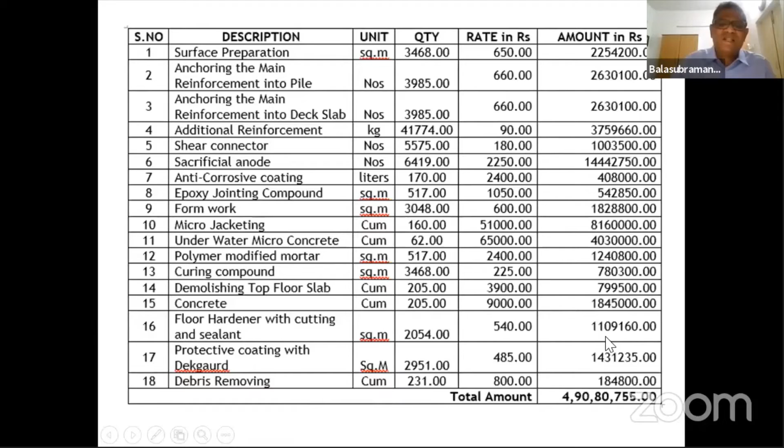It's a huge amount of money. That's a lot of money. Things could have been better if people had moved in much earlier and stopped the corrosion. But they allowed it to spiral out of proportion and then do this. But that's how things happen.

And this is another bridge, the NHAI bridge.

Here, we had a lot of difficulty finalizing the scope because they were not willing to pay that money - I don't want to go into the background, but they didn't want to pay. We were worried, because for any NHAI bridge, you do an NDT test and give a methodology or bill of quantity that will definitely be vetted by a third-party professor or consultant. So he'll say, how can you do such a bridge with only 200 points done, and then come out with a rehabilitation methodology costing 50-60 lakhs. So we had difficulty convincing the client. Ultimately we need to go through because it is business, so we need to go with the project, and we have to be careful.

So this is the scope of work, a bridge on the Chennai-Bangalore highway. For the piers, we didn't have any issue - we did all those tests, I don't want to repeat it. We did not recommend any rehabilitation there; the piers are perfectly all right.

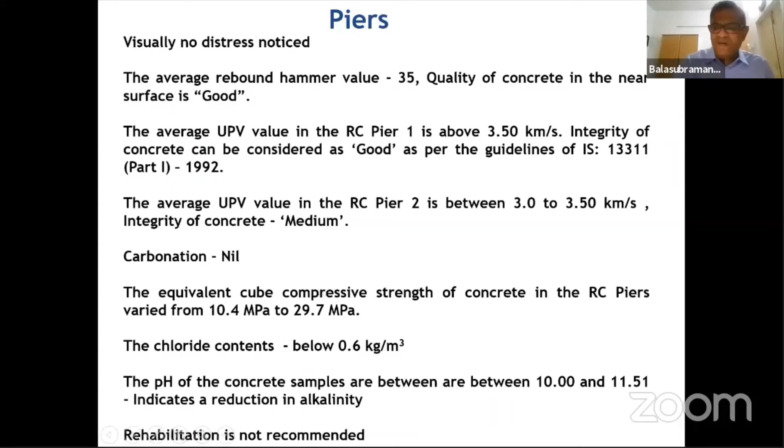The pier cap had some issue, so we went for dry spray mortar because this bridge is still in operation. Large containers move on top of the bridge and we cannot stop the traffic. So if you have to give microconcrete jacketing and all that, you would have to put a core through the deck slab.

Suppose your beam or slab has to be rehabilitated with micro concrete jacketing, then you need to put a core, make a space to pour the concrete. So that's not possible everywhere, so we went with dry spray mortar, M40 grade concrete. Here you can see the girder. Huge containers are moving on these bridges, and the factor of safety is so high.

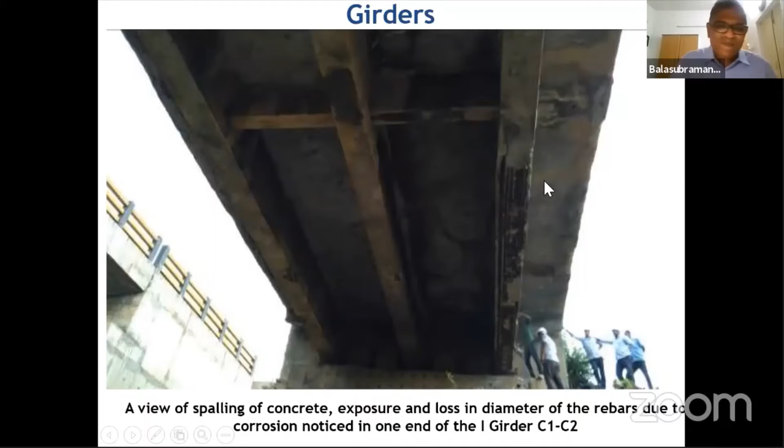Despite so much spalling and exposure of reinforcement, there is no problem to the bridge. So here we did all the testing, and the girders were not that good, so they were grouted with low viscous epoxy resin, and all the girders were given a repair with dry spray mortar.

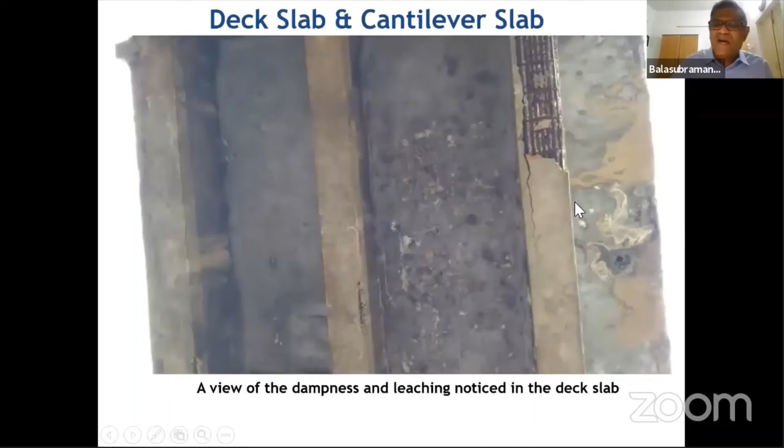In most bridges you will find that the rainwater spouts are invariably clogged or bad. So the cantilever portion always gives a problem. Here also we had a lot of problem with the cantilever portion of the deck slab, where it is overhanging, where they put the rainwater spout. It's a very simple thing but maintenance is a problem. Simple things lead to issues over a period of time, and it keeps accumulating.

You will see so much corrosion, rebar corrosion, everything. You have to pay unnecessarily. Instead, if they had done the rainwater spout properly, gone there every 3 or 4 months and rectified it, all these problems would not come.

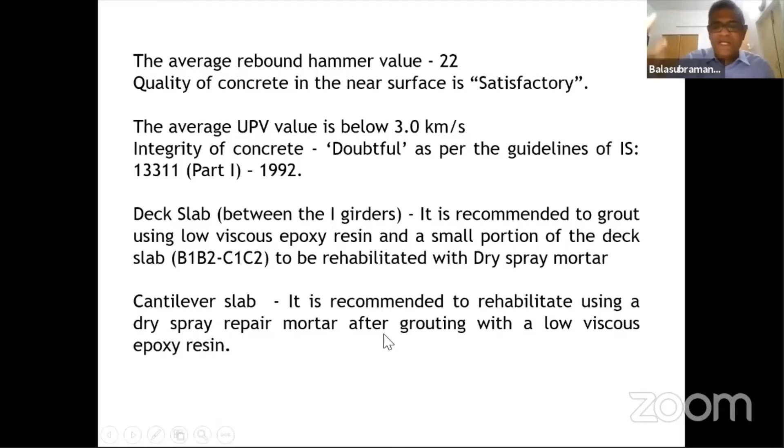For the cantilever deck slab, we recommended using dry spray mortar again, because micro concrete jacketing was just not possible, since we had to cut a core through the deck slab where the traffic was moving. The abutment was perfectly all right, so no rehabilitation methodology was given there.

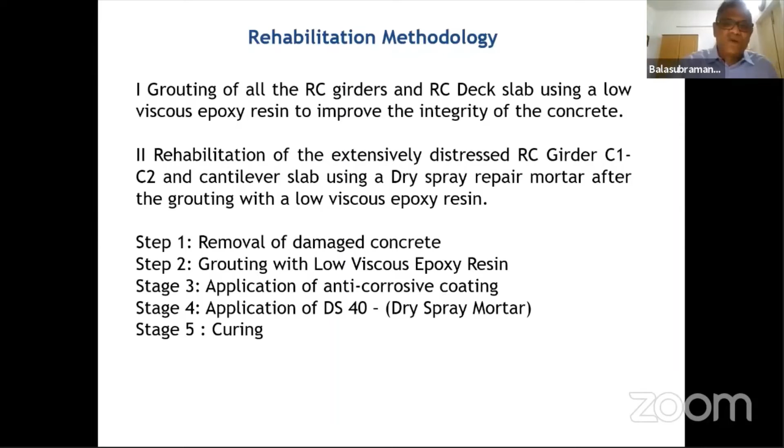So the final rehabilitation methodology was grouting all the RC girders and deck slab using a low viscous epoxy resin because they were in bad shape. Only one girder was extensively distressed, so we recommended dry spray mortar there. The general methodology: removal of the damaged concrete, grouting, anti-corrosive coating, then applying dry spray mortar or polymer modified mortar in some cases, or micro concrete jacketing in other cases, then curing.

It's repeating, so let's prepare the bill of quantity here. You have to be very careful because it goes to the NHAI government body, so when estimating the quantity, length, breadth, everything should be properly specified. Then you give a detailed specification, and the bill of quantity here comes to about 51 lakhs as the cost for the rehabilitation. Each number has to be properly justified this way. That's how it is done.

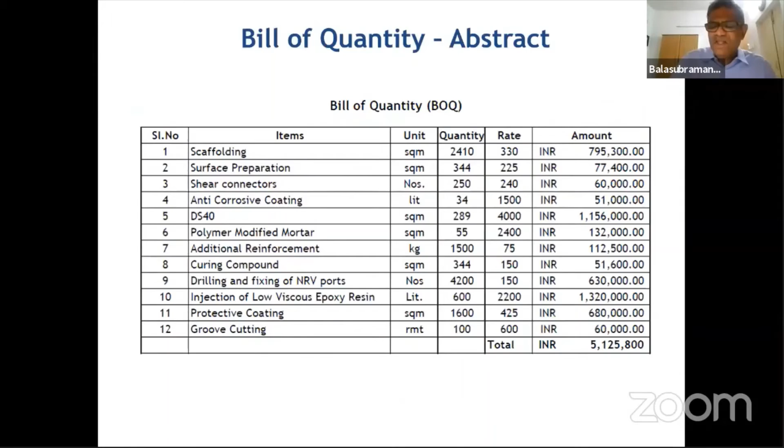In summary, in most sites only routine investigations are done, because of a combination of several factors - the limitations of the test and equipment are not well understood. Just because I have some equipment doesn't mean I need to use it and justify it. That is not required for any consultant, because your client is approaching you to solve the problem. You should be very frank about how you are solving the problem given the limitations of the equipment. Then it solves a lot of problems.

The focus is more on closure of NCs and finding immediate solutions to durability related issues, and this often does not address the real cause or the service life of the structure. Experience has shown it is imperative to use advanced techniques to fully understand the cause of distress - there is a clear need to adopt more reliable investigation methods that interface with other disciplines of engineering and physics. This is very important but may take longer. A lot of people are working on it, but the confidence level has to be built up so these things can be taken to the site. As of now, we are doing rebound hammer, UPV, core, half cell, resistivity, and powder sample.

That's it. We need to solve the problem of the client. Bottom line is you try to solve the problem of your client and try to do it as ethically as possible. That's the bottom line. You may have a lot of theoretical questions on this. It is very difficult to answer many questions, like how do you fix the numbers, how do you fix the number of cores. Nothing is there - it's your experience, and it takes a little longer time. But with experience, you can do it. It's not a problem.

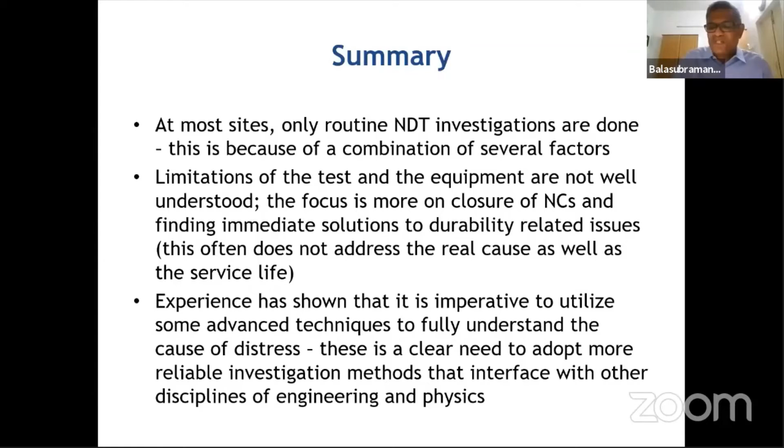So you need to take it along as you go along. This is what I just wanted to share with you. Thank you very much. I thank again Professor Ishwar Reddy and Yuvraj for giving me an opportunity to speak to all of you. Thank you so much. Any questions, I will take it. If I know, I'll give the answer, because for me, every day is a learning process.

Sometimes I'm also forced to do NDT in elements and structures where it is absolutely not required - for example, a plastic shrinkage crack. I'll tell them, 'Sir, it's a plastic shrinkage crack, why do you want to do NDT?' They say, 'Sir, they have put an NC, please come and do it, you want to close it.' So I go and hit a rebound hammer and I don't give the strength at least. I tell them clearly, 'No, I will not give the strength, I simply say the number and whether the surface is good or bad.' They say, 'Sir, that is enough, we'll close the NC.'

This is crazy, I don't know why such things are happening in the industry - wrong tests being done for wrong issues. These things happen, so please understand the limitations, particularly faculty, when you are teaching or doing any work. Understand the limitation and be careful about the limitations, because the easier thing is: rebound hammer is 80,000 rupees, take it, hammer it, give the strength. You be very careful, sir, on this.

So any questions are there, I'll take it, sir. Yeah, thank you, sir. Sure. You can stop sharing, sir. Yeah, sorry, sir.